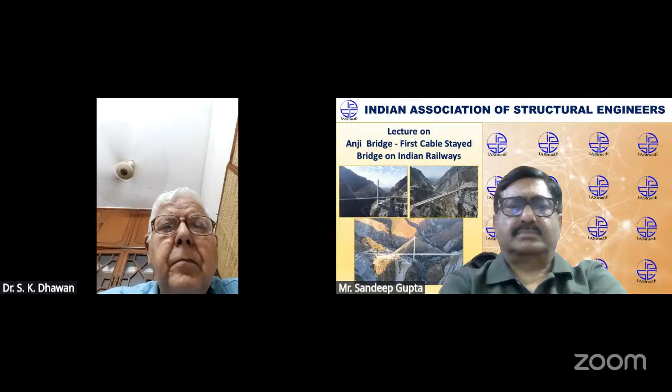The Indian Association of Structural Engineers, also known as IAStructE, was conceptualized and constituted in the year 2002 by a group of senior professional structural engineers from all over the country. IAStructE is registered under the Societies Registration Act 21 of 1860.

IAStructE is a national apex body of structural engineers in India with a mission to promote the structural engineering profession and cater to the professional needs of the structural fraternity. In the short span of 2 decades, the association has attained an eminent position in the professional field. Its membership is valued very highly in the profession.

Since inception, IAStructE has been led by eminent structural engineers like late Shri Mahendra Raj, late Shri Shri Kumar Ghosh, Shri Subhash Chand Mehrotra, Professor Mahesh Tandon, Shri Alok Bhaumik, Shri Manoj Mittal and Professor R. Pradeep Kumar as its president. IAStructE is a permanent member of the Engineering Council of India and interacts with the government on professional and policy matters related to civil and structural engineers.

To expand its reach, IAStructE has collaboration with various international professional like-minded associations and institutions. IAStructE's prime objective is supporting and protecting the profession of structural engineering by upholding professional standards and acting as a mouthpiece for structural engineers in India.

IAStructE endeavors to ensure that its members develop the necessary skills in structural engineering and work to the highest standards by maintaining a commitment to professional ethics and standards. IAStructE is actively engaged in organizing several continuing professional development (CPD) courses for structural engineers to help them update their knowledge and advance their career paths.

It also conducts refresher courses for young and practicing engineers and student-oriented programs, seminars, workshops, conferences, technical lectures and discussions related to the latest technological advancements. Case studies are also organized regularly for members to enable them to continuously update their knowledge and skill set by interacting with the best minds from the industry.

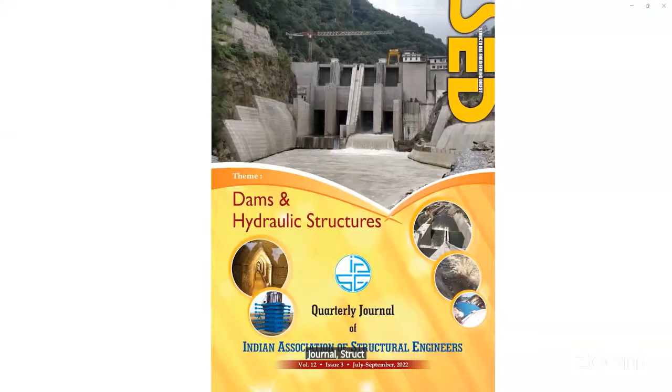IAStructE's activities are widely appreciated and known for quality technical content. IAStructE is also actively engaged in publishing its quarterly journal Structural Engineering Digest (SED), code commentaries, professional guidelines, and a monthly newsletter. IAStructE's publications are becoming popular with time.

IAStructE has representation in various technical committees of BIS and IRC as well. Its members are actively contributing to National Code Formulations.

In the year 2020, IAStructE started a National Awards competition to stimulate interest in the structural engineering field and to promote innovative thinking and creativity. The awards are presented to winners in recognition of their outstanding contribution to structural engineering in categories including Outstanding Structure, Outstanding Structural Engineer, Outstanding Woman Structural Engineer, Promising Young Structural Engineer, and Best Master's Thesis in Structural Engineering.

IAStructE is currently operating from 4 regional centers, namely Eastern, Western, Northern, and Southern, having its headquarters in Delhi, to inculcate professional culture and provide handholding to budding engineers. IAStructE also has student chapters in several leading engineering institutions.

Membership of IAStructE is open to all civil and structural engineers engaged in the structural engineering profession. Members are elected based on their qualifications and experience in different grades as per eligibility requirements prescribed in the bylaws. Each application is carefully scrutinized before electing the members.

More information about IAStructE is available on its website, www.iastructe.co.in.

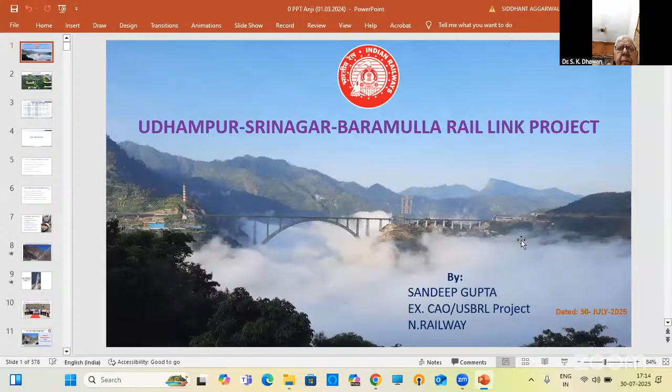I hope the screen is visible and I am audible. Yes, please. So I'll just start with a very iconic picture of the iconic bridge, the marvel of India, that is Chenab Bridge. What we'll say, a bridge above the clouds, as you used to say for the Millau Viaduct, that a bridge is over the clouds. It's a majestic picture. I'll start with this.

So before taking up the presentation on Anji Khad Bridge, I'll briefly dwell on the overview of the project, that is the Udhampur Srinagar Baramulla Rail Link Project, which is 272 kilometers long, and it is a national project. It was declared a national project by the Honorable Prime Minister in 2002.

Post-independence, this was the most difficult and challenging project for the Indian Railways to construct. It was a dream which was dreamt many times, but now it is a reality. People thought that it will never be done, but Indian railway engineers proved everyone wrong, and now you can go from Katra to Srinagar by rail in less than 3 hours. And I invite everybody to take a ride from Katra to Srinagar. They can go in the morning, come back in the evening, whereas by road it takes a lot of hours.

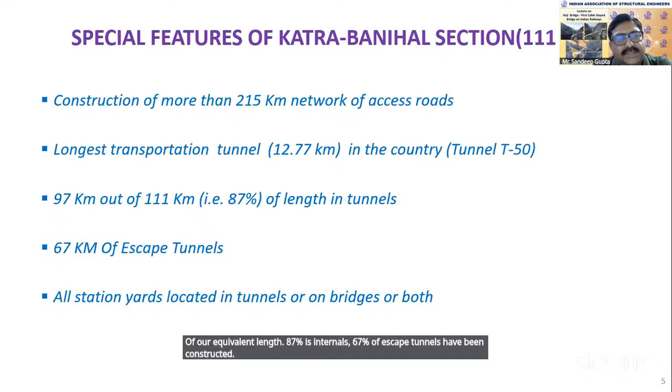Katra-Banihal section has special features. We had to construct about 215 kilometers of approach route, which was a project in itself. The longest transportation tunnel of the country, T50, is 12.77 kilometers long, with a parallel escape tunnel of equivalent length. 87% is in tunnels, and 67 kilometers of escape tunnels have been constructed. All station yards are located in tunnels, on bridges, or both.

Another special feature of this project, first time on Indian Railways: as in metro railways, all station yards are on ballastless track, and the turnouts are canted and jointless. In all 7 stations we have provided BLT, ballastless track. There are no joints, so when you travel at 100 kmph through a yard, you won't feel as if you have crossed a yard.

Similarly, the world's highest railway arch bridge, Chenab, is there. The first cable-stayed bridge on Indian Railways, Anji Bridge, though not the world's first, people were skeptical whether it would be possible, but we did it. For the first time we used reinforced earth embankments up to 60 meters high to accommodate the yards, and for the first time on mainline broad gauge railways we have used rigid overhead conductor system, ROCS, for electrification.

I'll dwell for a few seconds on the Katra-Reasi section because this was the most critical section for commissioning of the entire project. We completed the work well within December 2024. We did the load testing of Anji Bridge, but because of the time available with Commission of Railway Safety, the inspection was carried out in the first week of January. We did a successful speed trial on 8th of January 2025, and got CRS authorization on 14th January 2025.

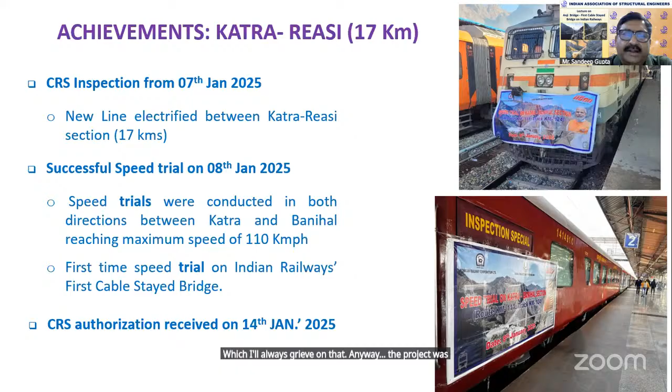However, due to certain reasons, the entire project could not be dedicated to the nation till February 28th, the time I retired, which I will always grieve over. Anyway, the project was finally dedicated to the nation by the Honorable PM on 6th of June.

I'll show you a picture when we did a speed trial on this bridge. This is the day, 8th of January 2025 this year.

After commissioning of the section, we did trials of Vande Bharat trains, because initially it was envisaged to start train services between the mainland and Delhi using specially designed Vande Bharat trains due to the temperature and long tunnels. This is one of our small videos of one of the trials.

I'm just concentrating on Anji Bridge because my lecture is on this bridge only.

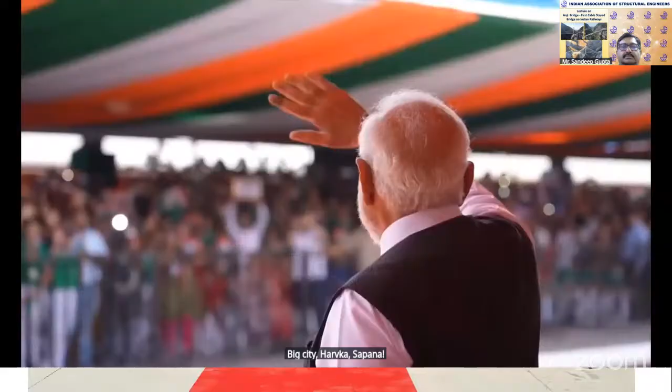Now I'll start with the main topic. Sorry, I took about 20 minutes extra. Doesn't matter, please continue.

Now, the evolution of the idea of construction of Anji Bridge across Anji Khad. Initially, we had two iconic bridges on the Katra-Banihal section, Anji Bridge and Chenab Bridge. At the time of award of the contract, around 2003-04, both bridges were planned to be constructed as arch bridges, just like Chenab Bridge.

I'll show you a GAD which was envisaged at that time. This was a GAD for Anji Bridge, like a small Chenab bridge. The only thing is, if you see the left-hand side, which is the Katra side, about 120 meters length is required, and the space at the Katra side was very limited.

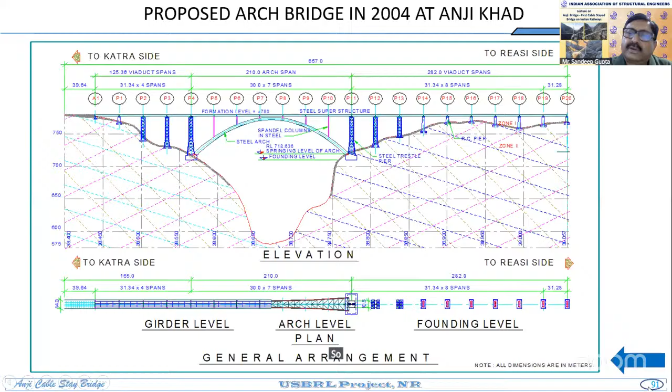There were issues about stability also. This work was allotted to Gammon JV in 2004.

However, due to alignment issues, there was pendency of works. All the works on the Katra-Banihal section were stopped by the Railway Board, and this work was finally short closed, as Gammon JV thought it won't be viable for them to continue the project since it was not sure when the work will be restarted.

From 2010 to 2015, the work remained entirely suspended, first because of alignment issues, then because of various PILs and repeated PILs filed by certain people who wanted to derail the project.

Finally, when all these issues were sorted out in May 2016, we appointed Messrs. Italferr from Italy. They are just like the RITES of Indian Railways, considered the Italian Railway, as the consultant for designing the bridge across Anji. The whole scheme was reviewed and a fresh view was taken to complete the bridge.

The main objective was to complete the bridge in a fixed time frame and to accommodate the two tunnels. The distance between tunnel number 2 and 3 was already fixed, as construction had started, with only 770 meters in between. So we had to accommodate those tunnels and construct a bridge at that location.

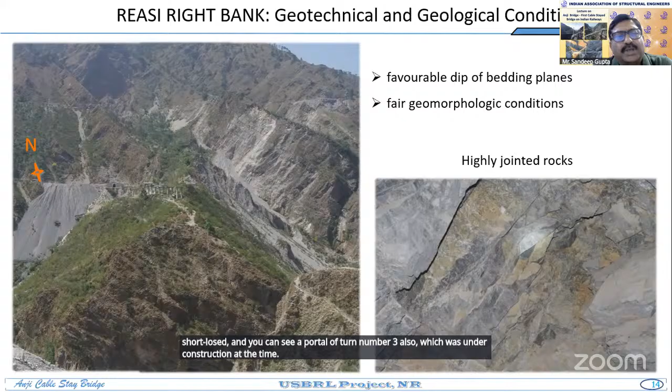On this side, if you see the left photograph, you will see some piers constructed. These piers were constructed by the then Gammon JV when the work was not short closed. You can also see a portal of tunnel number 3, which was under construction at the time. You can just see the topography, how difficult it was.

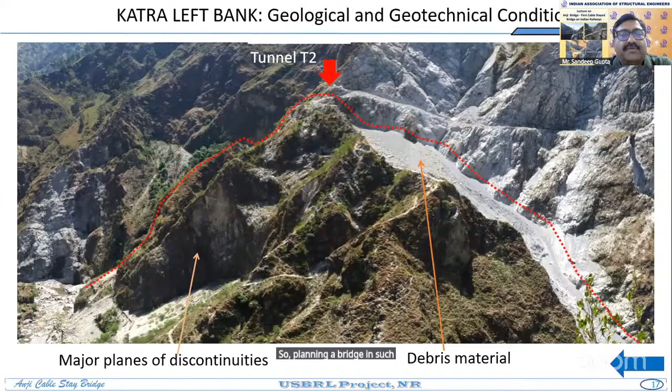As I have already explained, due to space constraint and slope stability issues at one of the ends, that is the Katra end, when we start from Katra, the first end, it was decided to go for an asymmetrical solution in view of available space and good slope stability at the Reasi end. We had about 350 meters of stretch which we could have used. So an asymmetrical solution was the viable option.

For this asymmetrical solution, two types of bridges could have been constructed: one was the cable stayed bridge, and the other was the spandrel truss bridge. The cable stayed bridge was finally zeroed on, and it was decided we should go for a cable stayed bridge.

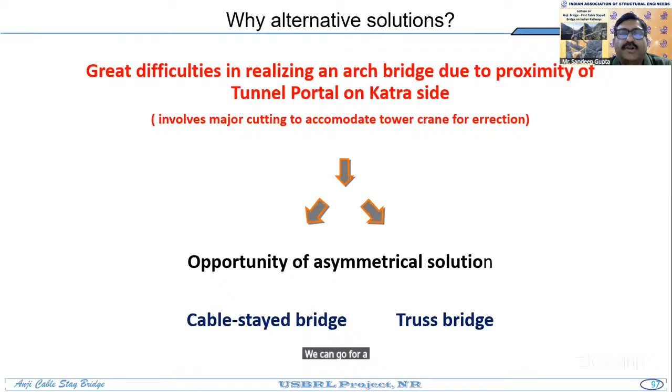For a cable stayed bridge and for a spandrel truss, the cost was comparable. Time of construction was minimum for a cable stayed bridge. We had fixed timelines and we thought, yes, it can be done. Risk in phased construction was also minimum for both cable stayed and spandrel truss. As far as maintenance goes, the cable stayed bridge was considered to have the least effort. So based on this SWOT analysis, we decided to go for a cable stayed bridge.

However, we had certain demerits and merits. I have already said that on the Katra side, only a small foundation would be there, a small abutment where the bridge will be resting. We won't be disturbing that slope.

All the works will be carried out only on one side, that is the Reasi side. No heavy equipment was required to build this bridge. For Chenab bridge, we had to construct a lot of enabling works. Here, only a single tower crane was required to be erected.

Construction phases were clear and well defined. Construction time is comparatively less, and a reliable program can be prepared. I am happy to share with you, sir, whatever we had planned: we planned that this cable stayed bridge would be completed in a timeline of 5 years, and we did it. We did it in almost less than 5 years.

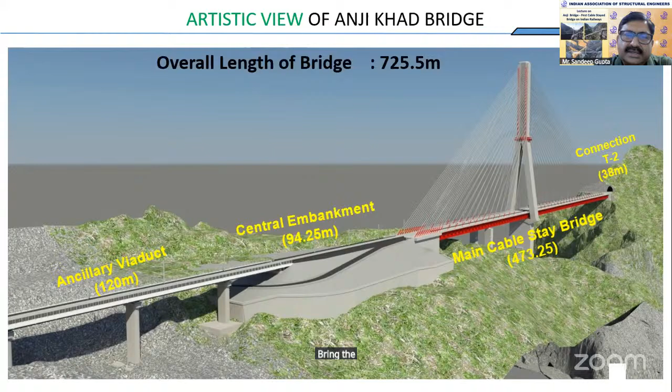The main bridge which we planned, cable stayed to bridge the Anji gorge, was 473.25 meters. There was a connection of 38 meters, required because otherwise, had we continued the bridge for another 38 meters, the height of the pylon would have become uncontrollable. Then we had to make 120 meters of viaduct, and then we planned a central embankment of 94.25 meters. You may ask why this ancillary viaduct could not have been extended right up to the cable stayed bridge. The reason is that for logistic purposes, we wanted to erect our erection workshop there — outsource our fabrication, bring the parts, erect in the workshop, and launch it. So that was the logic behind it.

Now this is a general arrangement drawing. I am talking about the main Anji Khad bridge, which is 473.25 meters long. As you see, this is an asymmetrical cable stayed bridge. The main span we call the C span, and the shorter rear span is the L span. The C span is 290 meters, and in the rear it is 80 plus 75 meters.

We have got a small pylon there to support it, and on the right side this is what we call a modified abutment, an innovative sort of abutment we call MA2 — that is main bridge abutment A2. Being an asymmetrical bridge, the total number of cables were 24 in the front C section, 24 in the rear section, 24 on the left side, 24 on the right side — so 24 into 4, that is 96 cables. Out of these, 12 cables balance each other, and those balanced 12 cables had to be anchored in MA2 so as to balance the bridge. Therefore we had to construct MA2 with special features, which I'll be discussing in my subsequent slides.

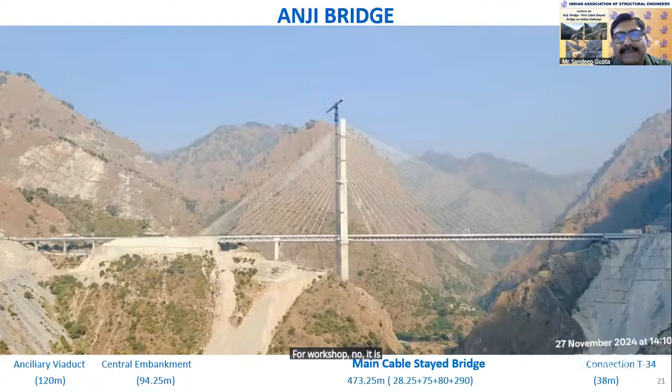Just to summarize the agencies involved: the main client was Northern Railway. The Railway Board gave the work of this section to Messrs. Konkan Railway Corporation on nomination basis — they were the engineers. The contractor was Messrs. HCC. Our design consultant, as I already told you, was Messrs. Italferr from Italy. Slope stabilization was done by IISc Bangalore and IIT Delhi. For proof design, the proof consultant was Messrs. COWI from UK, and as far as slope stability goes, it was ITASCA from US, which did the proof checking through 3DEC analysis, for which ITASCA are pioneers.

As I already told you, we had only 5 years to complete the bridge. We did not have the luxury like Chenab Bridge of 20-25 years. So we decided not to go for any fabrication at site, and to ensure proper and good quality, we outsourced our fabrication to 4 different agencies.

One of the agencies is ATMASTCO at Bhilai. Then Messrs. ArcelorMittal Nippon Steel in Surat, where maximum fabrication was done at this workshop. In fact, we added ATMASTCO when we realized that we may be running short of time.

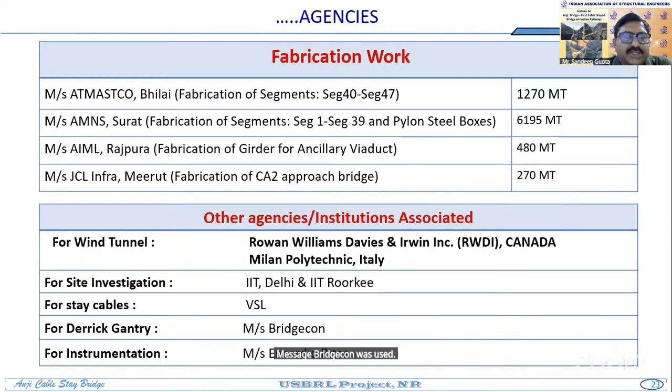For the stay cable installations, we used VSL from Switzerland. The derrick gantry, which was used to load the segments and launch it, was from Messrs. Bridgecon. And for the instrumentation purpose, Messrs. Encardio Rite were involved.

Now these are the salient features, as you see. From here it is very, very clear what is the height, what is the span. The main span is 290 meters. The main pylon is 193 meters. It is an inverted Y-shaped pylon. From the gorge bottom to the deck, the height is 196 meters. And from gorge to the top of the pylon, the height is 331 meters.

For construction of the pylon, we used Doka jump form shuttering. Since slip forming was not possible, we constructed the pylon in segments of 4 meters, and it was a continuous construction. The joints were prepared in a very professional way. If you see the photograph, you won't be able to identify the joints.

These are the salient features of the bridge. As I have already told you, the main bridge is 473.25 meters in length. 290 meters is the central span. The rear span involves 80 meters plus 75 meters.

Then MA2, the main abutment where 12 cables are anchored, is 28.25 meters long. Then there is the central embankment of 94.25 meters, ancillary viaduct of 120 meters, a connection at Katra end of 38 meters, making the entire length 725.5 meters.

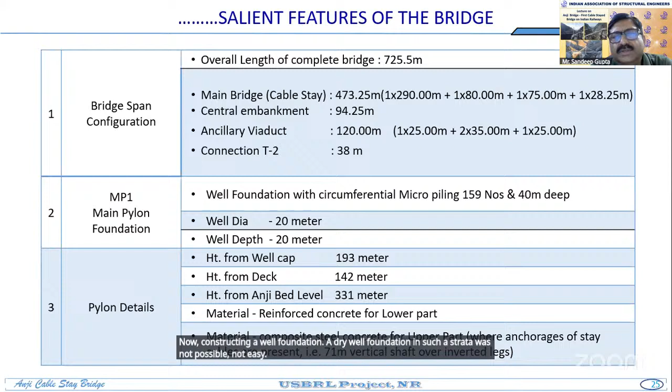The main pylon on which the entire bridge is resting has a well foundation. Now, constructing a dry well foundation in such a strata was not possible, not easy. We used the method of circumferential micropiling, and then we did manual excavation, which I'll be discussing in detail in my subsequent slides. The diameter of the well is 20 meters, the depth is 20 meters.

Height from well cap right up to the pylon, as I told you, is 193 meters. Height from the deck is 142 meters, inverted Y. Height from Anji bed, again repeating, is 331 meters. Material used in the lower part is reinforced concrete - lower part meaning till the Y junction. The vertical shaft is a composite steel concrete structure because all the stays are embedded in it. For that we needed tensile stresses also, tensile forces. So it had to be a composite structure.

As you see, the deck width of the main bridge is 15 meters. Now it is very interesting - we had to construct a bridge only for a single line track. The width could have been around 8 or 9 meters, which would have sufficed, but we had to make a wider deck because of stability concerns, because of high winds. So we planned to have one track broad gauge line and a parallel service road of 3.75 meter width for our disaster management.

Then the deck width on the embankment was again 14.5 meters. For the ancillary viaduct, as I told you, it is 9.45 meters, with no service road on that. Then the deck width connecting the last connection is 13.4 meters. Coming to stay cables, very interesting - as I told you, we had a total of 96 cables.

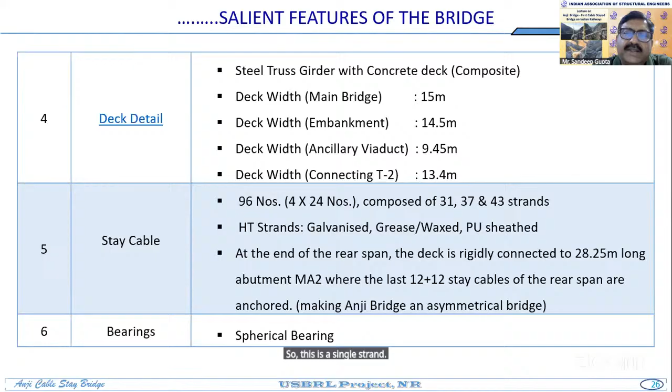That 15.7 mm diameter becomes 18.7 mm, and every strand is replaceable. So this is a single strand, and 31, 37, 43 strands make up a cable, depending on the design.

At the end of the rear span, the deck is rigidly connected to 28.25 meter long MA2 abutment, where 12 plus 12 stay cables of the rear span are anchored, making Anji bridge an asymmetrical bridge. All the bearings are spherical.

The design life of the bridge is 120 years. The maximum speed for which it is designed is 100 kmph. The service loads have been designed as per MBG 87 loading of railway loading. Design loading is IRS railway codes. However, the design of structures has been done using BS and Euro codes.

The critical wind speed based on our wind tunnel testing is 213 kmph for a 3-second gust. As per earthquake zoning, the Anji Khad location lies in zone 4, but we designed for zone 5. We did site-specific spectral studies through IIT Delhi, and based on the maximum critical earthquake and PGA parameters, we designed the bridge.

These are certain quantities which I will not dwell much on. You can just see the enormity of the bridge. For the main pylon we used 159 micropiles. Some cable anchors were used for the slope stability, and so forth.

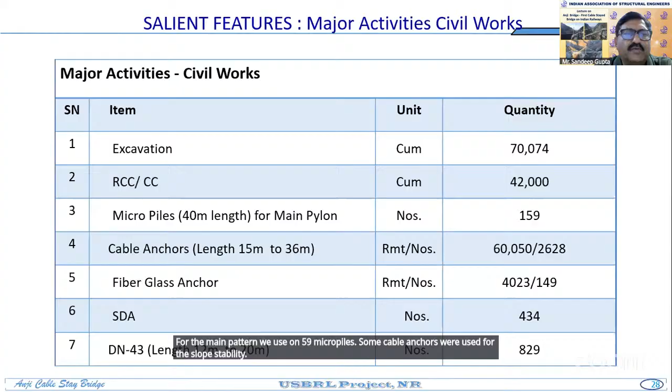The main interesting part is the stay cable installations. 96 cables were used. The length of each cable varied from 80 meters to 290 meters, depending on the length of the bridge. If we add up the entire strands, the total running length is in the range of 650 kilometers plus.

That is the distance from Anji to Delhi. The weight was 850 tons. Just imagine weaving 650 kilometers of strands one by one. How much time and effort it must have taken.

Then there were special bridge expansion joints, because being a very long span bridge, special BEJs had to be manufactured. We got it done through Foslo. Then SEJ, that is switch expansion joints or rails, we call them rail expansion joints, special rail expansion joints. These are also special, not used on Indian Railway as yet. Again from Foslo, 2 numbers were used.

Then track linking was 780 meters. An aberration is here: the entire section from Katra to Banihal has been designed and constructed on ballastless track. But for this Anji cable-stayed bridge, we decided to go for a ballasted track. The reason is that there is a camber of 40 centimeters at 2/3 of the length, and had we provided ballastless track, it would have cracked.

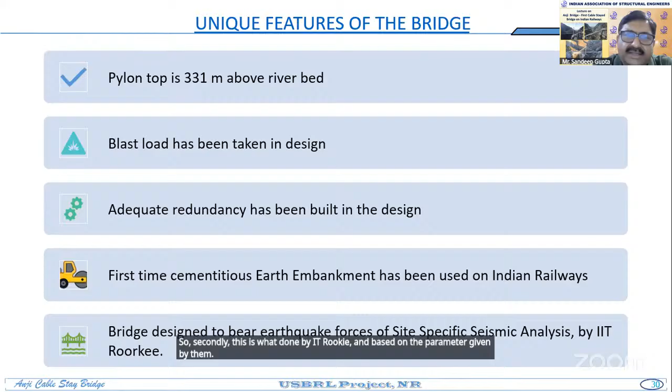The bridge has a service road of 3.75 meters along the track because we have an escape tunnel in T2. From the escape tunnel, you can go along the road, but this is only for emergency conditions. Then, state-of-the-art instrumentation for structural health monitoring of the bridge has been done.

On this project, we have provided a state-of-the-art instrumentation system for monitoring structural health on 4 bridges: Chenab Bridge, Anji Bridge, Bakkal Bridge, and Reasi Bridge, each having a separate control station. For Anji Bridge, we have a control room right inside main abutment 2 on the bridge itself. The bridge has been designed for a critical speed of 213 km/h for a 3-second gust.

As I have already told you, 8260MT structural steel was used for the superstructure steel boxes. Now coming to the construction methodology and launching sequence.

As I have already elaborated, we had a mandate to complete the bridge in the shortest available time, which was decided as 5 years. So we had to plan a scheme very meticulously so that we could do a lot of activities in parallel, and the bridge could be completed, including load test and track linking, in 5 years.

So the first part was what we started. I am not discussing the ancillary viaduct part; that was done separately, we can consider it a separate bridge. For the main bridge...

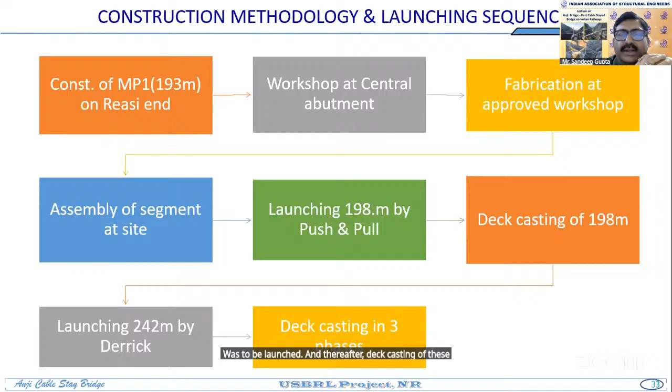Thereafter, we had to erect the derrick gantry, and with the help of that gantry, the balance 242 meters was launched. After that, deck casting of this 242 meters was done in 3 phases as per the designer's scheme.

So just to summarize, the main pylon, 193 meters, had to be constructed at the Reasi end, completed well before we started cable launching. Similarly, the workshop had to be assembled and segments erected there by the time we needed to start the end launching.

The 10-meter long span I have already discussed. All segments fabricated in the outsourced workshops were jointed by HSFG bolts, M27 10.9 class HSFG bolts. We ensured no welding took place at site to maintain quality. So incremental launching, launching by derrick gantry for 242 meters, and deck casting—I've already discussed these. Now, going stage by stage, I'll take you through the next 5-7 minutes.

Then phase 2, my workshop is ready. The earthwork has been done. Steel girders for incremental launching - we have to erect a 30-meter long launching nose. Fabrication has to be completed.

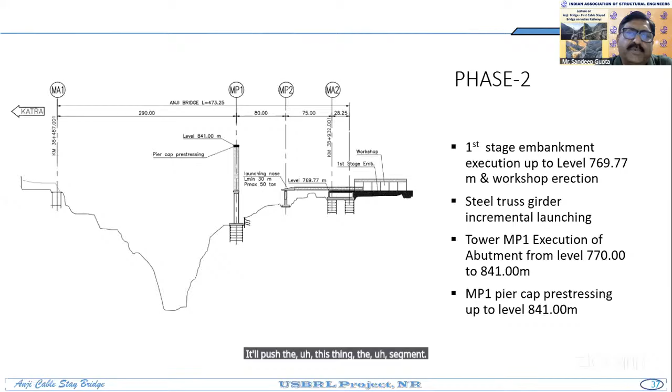Now the next stage is that we have to make up the MA2 abutment and earthwork so that I can now launch my segments over this deck. Therefore it has to be made up, and that work was done in phase 4.

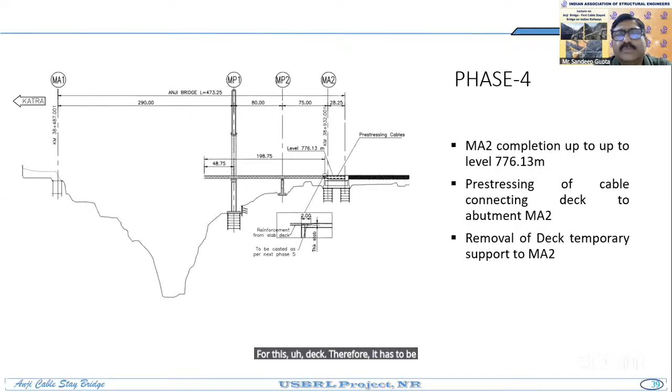Then phase 5 involved erection of my derrick gantry, the launching gantry, for facilitating launching of my segments. Now there is a catch - what problem occurred was that this is the plan given by the designer, but at site it was not feasible. I would like to emphasize to all budding and seasoned engineers: every bridge has site-specific issues. You cannot go purely theoretically by what the designer says sitting in Italy. We are at site, we have to use our head, use site-specific solutions, and have an interactive session with designers to convince them what can be done and what cannot.

The problem was that the designer decided the launching gantry had to be erected right at the end of the segment which had been launched. Now, for erecting this gantry, I needed a tower crane. My tower crane had a jib length of 35 meters and a capacity of 25 tons - it could not have been used to erect the gantry.

So, as I was chief at that time, I gave a solution to my site team and HCC people: why don't we erect this gantry at the pylon location, have rails after erection - because that can be done using the tower crane - and then push it to the end of the already launched segment. Now Italferr was not agreeing to it because it involved certain stresses. But on my insistence, they rechecked the design and finally had to agree to it, and this way the things were done.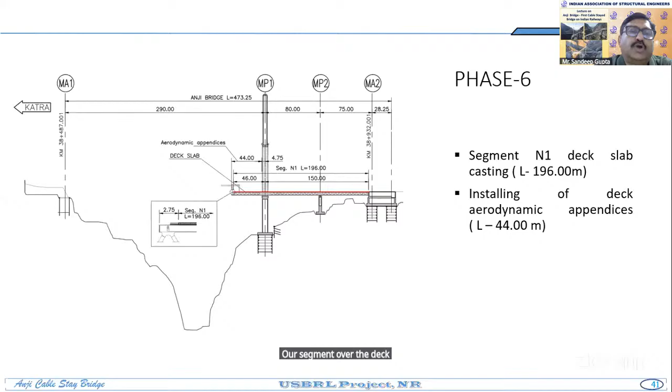Now you see, after the gantry was shifted to the location where it was needed, the deck was cast. The deck was cast because now we wanted to move our segment over the deck so that it could be launched by the derrick gantry using stay cables.

Now, the next stage - even before I start launching my first segment, I had to install 2 sets of cables and stress them, because the gantry itself was 200 tons and the individual segment was 150 tons. Had we not stressed these 2 cables, the gantry would have toppled. Just to give more strength, we had to first, without even launching, install these 2 sets of cables and stress them. Thereafter, launching was possible.

In the first stage of launching, 10 segments of 10 meters long, that is 100 meters, were launched. The segments are 15 meters wide.

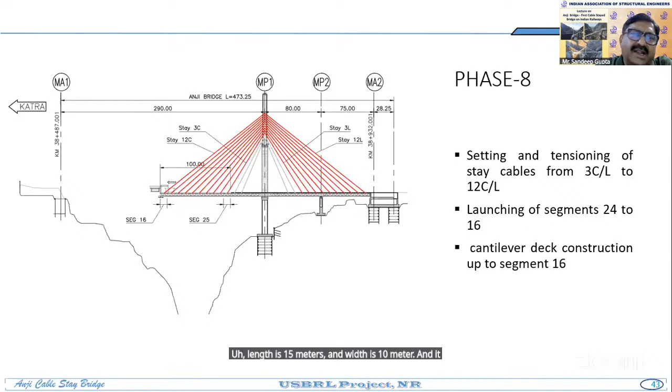After completing this 100-meter launching, we did the slab casting. Now, after slab casting, I'll show you in my subsequent slides.

After launching of each segment, we used to measure and draw the profile of the deck, the profile of the pylon, and the levels of the top of foundation, and compare it with those given by the designer. Yes, there had to be variation - we used to share this with them in Italy, and only after they gave us the go-ahead did we launch the next segment.

So you would appreciate, we had planned to launch 3 segments every month - that is 1 segment per 10 days - and we ensured that it was done. We were monitoring it on a 24-hour basis. The team of Northern Railway, Konkan Railway, HCC, and VSL worked in tandem. It was an amazing show of team workmanship. I would like to acknowledge this fact, sir.

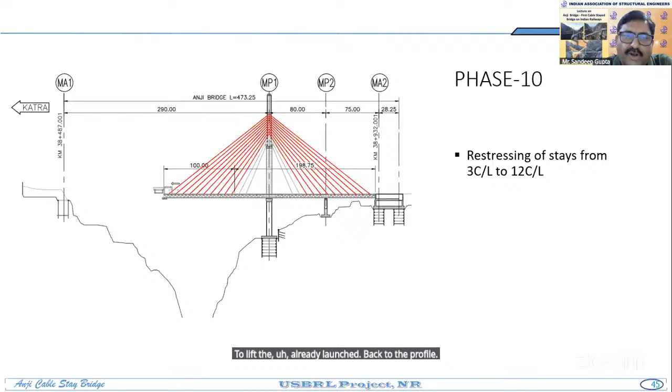So after this, based on the designer's input, first stage stressing of all the cables was done to lift the already launched deck to the profile envisaged by the designer. Thereafter, we went ahead and launched another 10 segments.

The last 3 segments were launched without any stay cables, as per the design, already explained. Before laying the deck for the last portion, we had to put some loading on the derrick end, because if we had not done this, re-stressing of the cables could have caused upliftment.

Based on that profile, we were very fortunate because of our good workmanship, quality control, and close monitoring. The last segment perfectly launched and got rested on the abutment. Thereafter, as per the designer, we did final restressing of the cables.

Then the deck was cast. The ballast and the gantry were removed from the other end. Now, we have already completed the cabling work, the deck is complete, and the profile is perfect.

But for future analysis, we need to know what is the force in each of the cables. So every time we work out the actual force in the cable—in the subsequent slide I'll show how we have done the weighing.

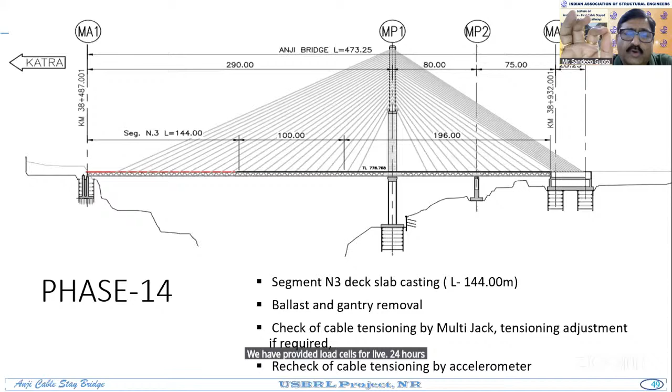In phase 15, we finished the work and laid the track. Again using the accelerometer, we find the force in the cables, check it with the designer's values, and when it is ensured that no restressing is to be done, we cut the cables, fill them with grease, and provide the caps.

This is the complete bridge picture, which has been done.

Now, you must have been bored by my lecture. I will show you a small video prepared when the bridge was not exactly completed. It will show you the push-pull launching method, then the launching method used by the derrick. Thereafter, I'll show you another video only for launching. So if you permit me, I'll just show you the video.

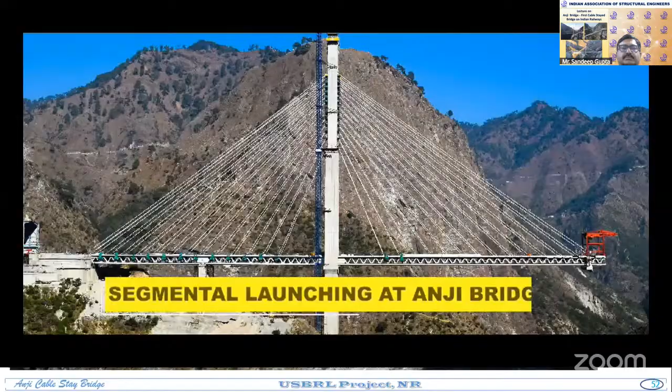Sorry, I'll just stop at this location. I'll show you another video of a segment launching, which is more interesting. Now, please—this is a segmental launching.

This is a segmental launching.

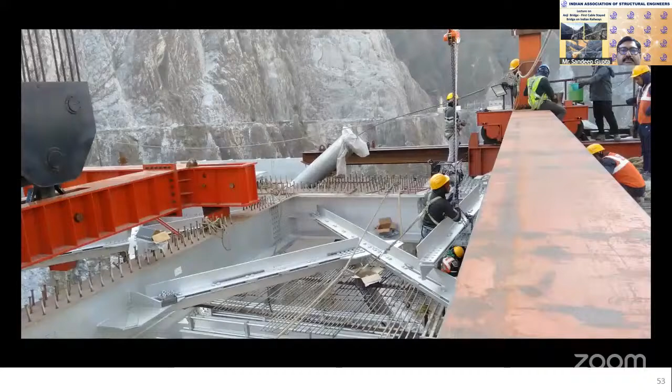The most interesting part of this launching, you may see—this photograph shows a very, very flimsy launching gantry. This gantry had a capacity of 200 tons. My segment was 150 tons. The yellow part is the hoist, which lifts the segment.

And then there is a cantilever portion of 10 meters where the gantry is taken and lowered. We had a limitation of load because the designer told us the gantry cannot be more than 200 tons of weight, and we needed space also. So the entire gantry seemed very, very flimsy—it was not giving much confidence to me. We started to launch the first segment in May 2022.

R.K. Gupta of Bridgecon, the late R.K. Gupta ji, was a very good friend of mine. His company designed this derrick gantry. I discussed it with Gupta sir because he had worked with me earlier also.

Gupta ji, I am not very, very sure whether this is going to work. I am worried my segment may crash into the gorge. He assured me, Sandeep, nothing will happen, you just go ahead with it.

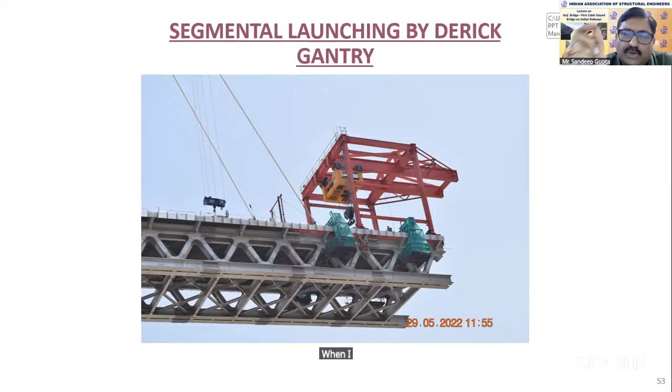I asked my deputy chief here, it was evening about 4 or 5 o'clock, to go climb the gantry and see what is happening. That day only, the new chief administrative officer had joined.

He had no stakes at that time. I told him, sir, things are not good, I am going to stop the work. Till this gantry is retrofitted, erected and tested, only then will I continue with the launching.

Now the time frame was very strict. The Railway Board would not have accepted a stoppage of one month. Then my CAO told me, you are taking a big risk, I am new, you are the arrowhead, you are going to get the stick.

I told him, sir, let them suspend me, let them transfer me, but I will not go ahead with any further launching till the time I am sure the derrick is okay. Sir, we took one month to retrofit that derrick.

The fixed joint had to be changed to hinge joints. Certain external prestressing was done. Thereafter we made a checklist of what levels we had to check every 2 hours. So when we started the launching again, the initial 3 days of the 10-day process were like a patient in the ICU.

For 3 days, none of us slept, till the load sharing happened by fixing of the top chord and splicing was done. Then the loads were shared. The first 3 days were like hell.

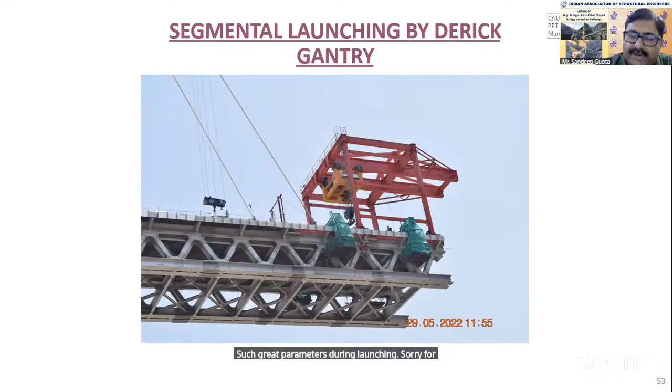Now this is the complete picture. If time had been there, I could have gone on for hours, but I will take some time to dwell on the construction of MP1, the main pylon, which people will be interested in.

As you see in this figure, the diameter is 20 meters for the proposed well. For facilitating construction of this dry well, we had to put in place micro piles of 20 centimeter diameter. The hole was 24 centimeters, center to center of 40 centimeters.

The piles were 40 meters long. The depth of the pile initially, as decided by the designer, was 30 meters. They envisaged that the founding level would be about 20 meters.

But as an abundant precaution, I was worried we may have to go further deep. I took a call to increase the depth of the piles from 30 to 40 meters, so that if we were required to go deeper, we would still have the required grip length. So this is the way we did it, as you see.

Initial drilling of the micro piles was very difficult. Lot of problems were there, frequent jamming of the machines was there. It took us about a year.

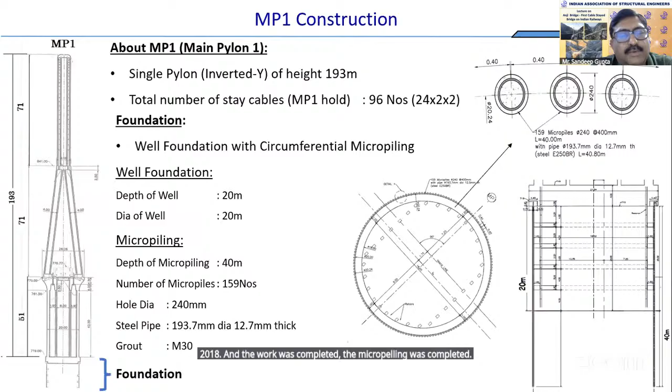We started micropiling sometime in April 2018, and the micropiling work was completed by about May 2019, so more than a year. These are some pictures of how we used the machines to do the micropiling.

I'll show you a small video also.

Once the piling was completed, we had a top well cap, 1.4 meters wide and 1 meter deep, before starting our excavation. Excavation was done using excavators. We had a high capacity crane to lower our excavators.

You can see the way we are excavating, and the enclosing micro piles - they are not exactly straight, but this is the best we could have done. We had a 40 metric ton capacity crane to lower the entire Poclain inside and to take out the muck.

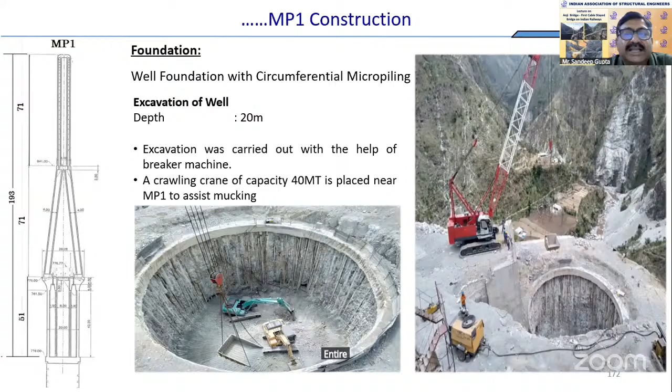Now we have reached the founding levels. Before we decided on the founding levels, our consultant from Italy came, went down the well, assessed, and then gave us a green signal to go ahead. Yes, now we can plug it.

Then we placed 24 columns of RCC at the periphery before doing the concreting. Now concreting has been done in M35. This is the top of this thing. Now the well cap has been cast.

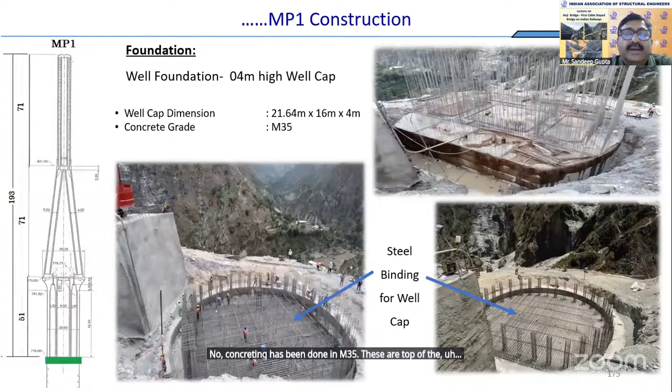After casting the well cap, we had to start construction of the main pylon, for which we needed a tower crane. We made a foundation for the tower crane just adjacent to the pylon.

The tower crane was from Comansa, Spain. The height of the crane was 205 meters, and our pylon was 193 meters - good enough. The jib length was 40 meters and the crane capacity was for 25 tons. As you increase the length of the jib, the capacity comes down. So these factors had to be kept in mind while erecting our main pylon.

This is a small video showing how we erected this special tower crane. Main pylon MP1 of this bridge will stand tall to a height of 193 meters from its foundation. For construction of such a high structure, there is a need for assistance of a tower crane, which makes this structure possible. Tower crane Comansa 21CM550 of 25 metric ton capacity is chosen for this role.

Tower crane mast section is set into a raft foundation with steel pedestal. Mast sections are plumbed to the required degree. Concrete support is added and then the crane is ready to be erected after curing of concrete.

After that, the first step is to build the initial tower. The tower comprises a series of sections called masts. Four such masts are connected with the use of a separate crane. After masts are set, the top climbing unit is added. This component is a special section set over the top mast and bigger in size, allowing for insertion of more masts. Without this, the tower crane would not be able to grow.

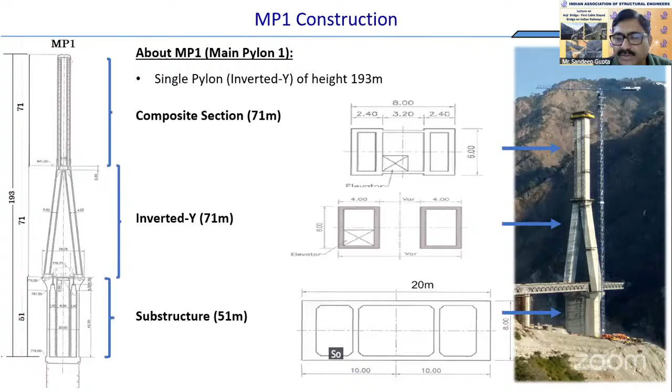Now this is the right side, you can see the Doka jump form shuttering. Outside shutters are lifted by jack, and inside shutters are lifted by the tower crane.

I'll just go briefly, and you can see how the construction progressed. In this Doka jump form shuttering, there are 3 platforms. The top is the working platform where we stand and do the concreting work. Then the first platform is where we adjust our brackets and jacks. Then the second platform is where we do the finishing work. And the bottom is where we do our curing work.

Let me add here, up to deck level we used pumped concrete, and beyond deck we could not use pumped concrete because the height was too high. And in the entire pylon, we have not used water as a curing compound or curing agent - we have used a special curing compound.

Now this is the way it progressed. Now we have reached the deck level. Up here, this pylon cap, deck cap had to be cast.

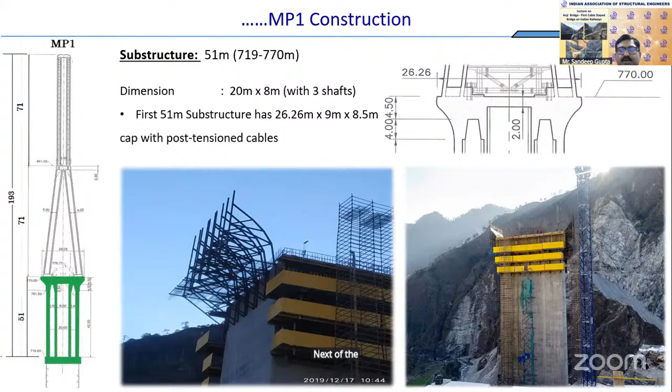This was around January 20. The cap had to be widened to accommodate the legs of the inverted Y. So the pier cap was pre-stressed.

One interesting feature is that when we were doing pre-stressing and casting of this pier cap, COVID was at its peak. In spite of COVID, we did not stop the work. We had a lot of fight with the state machinery, but we just went ahead with the work in a missionary zeal.

Now these are the cables. Stressing is being done. Now the pier cap is completed. After the pier cap, we have to start for the inverted Y.

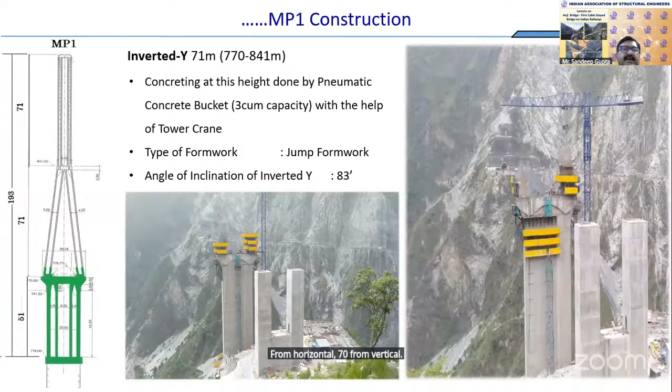The angle is 83 degrees from horizontal, and 7 from vertical. Now separate sets of shutters are there. One important thing is that for concreting, we could not use pumped concrete because of the height. We have used a pneumatic concrete bucket with a capacity of 3 cubic meters with the help of the tower crane.

The interesting feature is that whenever concreting was going on in these Y segments, it generally used to take us about 12 hours. All the workers, supervisors, engineers used to go climb to the location of concreting by a tower crane, which had a small cage.

But once they were at site, the cage was disengaged and the concrete bucket was attached, which means that for the entire 12 hours of concreting, nobody could come down. Food was sent above, and for nature calls, I will not discuss further. But this was the type of dedication we did.

I myself was there for 3 sets of concreting, continuous for 12 hours. My deputy chief engineer and executive engineer were 100% available. That's why we were able to achieve such good quality.

This is the way we are progressing. Now as you see, when the two legs come very close, then the shuttering of one of the legs had to be dismantled. That is, one of the legs' concreting has to be stopped because the space is becoming very less.

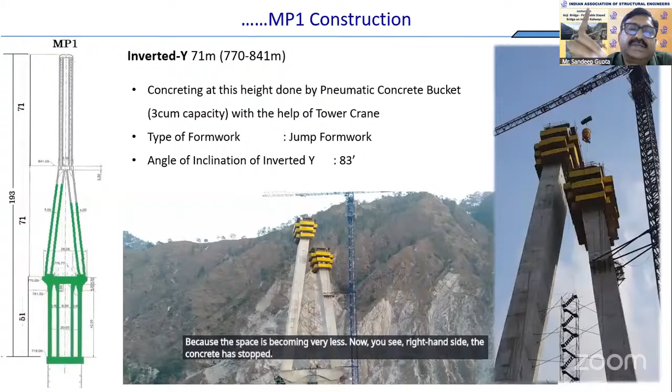Now you see, on the right hand side the concreting has stopped. On the left hand side we are taking over. Once the left hand side is over, then we will take up the right side. Now the two are almost at equal level.

Now a cap has to be constructed at this level. Because over this, a vertical shaft would be constructed, which will be composite, all the cables will be encased in the vertical shaft. Therefore, this pier cap was pre-stressed in both directions.

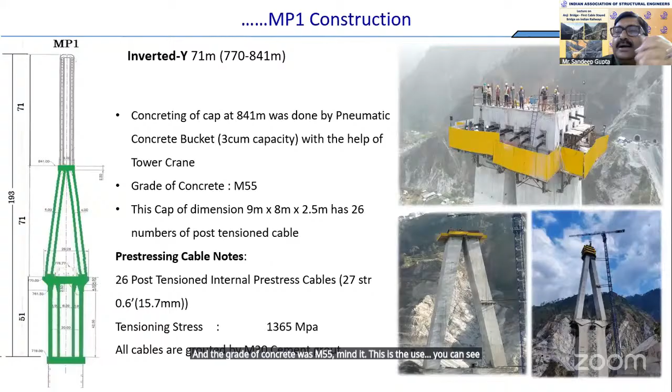And the grade of concrete was M55, mind it. This is, you can see the pre-stressing cables. These are on both sides. Now pre-stressing is done, completed, grouted, capped.

Now we have started the construction of the final vertical shaft, which is a composite structure. We have got fabricated steel pylon boxes of dimensions 5 meters by 1.1 meters, of different heights. We used to place those boxes at the location, connected with HSFG bolts.

They had shear connectors around them. Then we used to do the reinforcement work. So by doing so, the area became so congested after reinforcement that normal concreting was not possible. So for the entire vertical shaft of 71 meters, we have used self-compacting concrete.

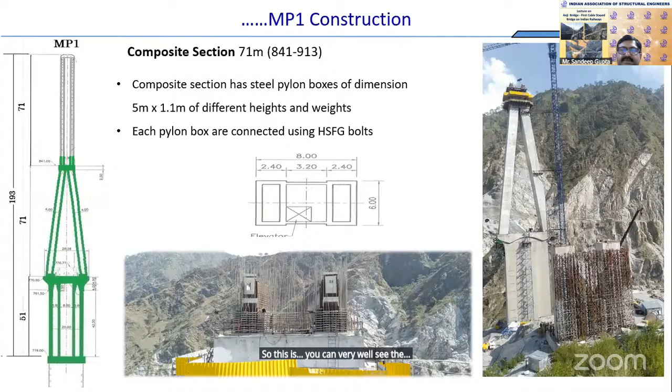Now this is, you can very well see the steel boxes. One innovation we did, which the consultant was not agreeing to. You see, the guide pipes had to be welded with the steel box, and there are guide pipes at the deck level.

These guide pipes are not at the same line. They are splayed because the width of the deck is 15 meters, and the width of this is less than 15 meters. So a very precise angle has to be set for each and every guide pipe. That exercise we did in the workshop, very perfect engineering, so that the angle is perfect, because such engineering cannot be done at the pylon site. So this was one of the changes we did against the design scheme, and it came up very well.

You can see we are erecting the boxes on the right hand side, doing the reinforcement work and concreting.

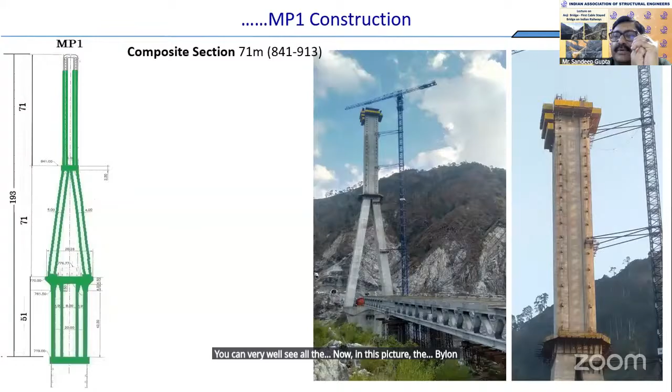You can see in this picture the pylon is completed. On the right side you can see the ducts. There are 24 guide pipes on the left and right sides for all the cables on both sides, at a very specified angle which was verified using total stations and precise surveying.

Now the cap at the pylon could be cast and closed only after completion of all the cable stressing work. That was the last activity. At the top, we placed a temporary platform to hoist and lift the stay cables.

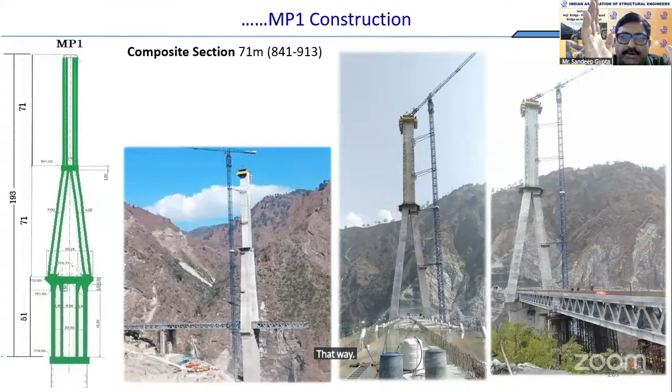This is one of the photographs. You will see that by the time my pylon is completed, the incremental launching using push and pull has also been completed. That means I am perfectly as per schedule. Now the next stage is to erect the gantry, which I'll come to later.

If you want, I can show you a small animated video, only for the pylon construction.

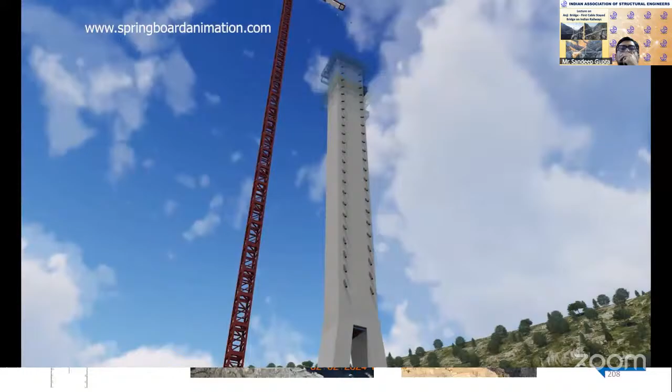Thanks for your patience.

Sandeep, sir, I have got two or three questions now, but since time is limited, I'll request Vikas to mail you those questions, since many people are now leaving the webinar. So I'll request Vikas to send you the questions and you can reply, and then we can circulate that. Will that be okay? Definitely.

Now, before we wind up, I have one or two things in mind. One is safety measures during construction, because so much work you have done. Second, the life of the structure is planned and designed for 120 years—how will we ensure monitoring for safety of the entire structure for 120 years? It's all exposed structure, whether steel or RC. For steel, what measures have been taken to prevent corrosion, and for the durability of concrete, to ensure its life for 120 years? What are the quality control and structural monitoring measures for the entire 120 years? This is my small request—please reply and then we'll wind it up.

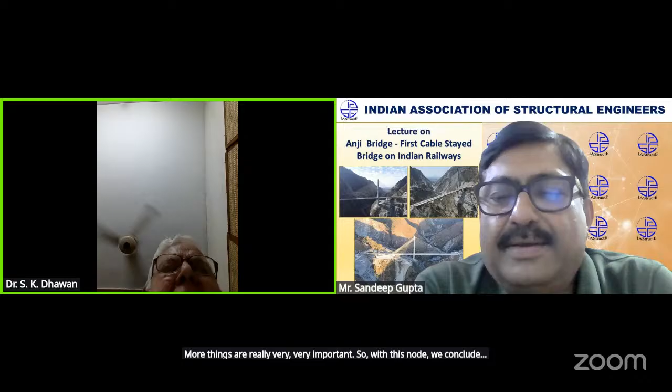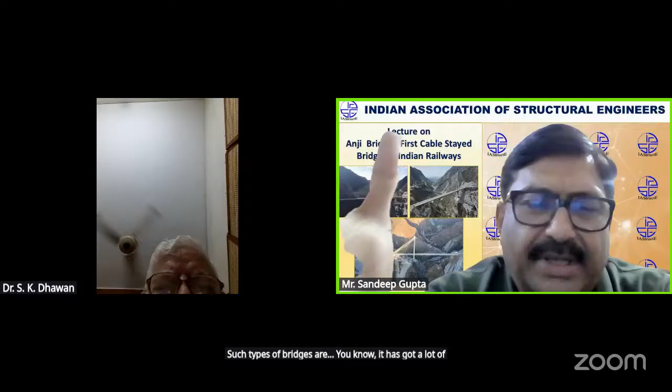And thanks to the speaker, Mr. Sandeep. Thank you very much, sir, and I hope you give me more opportunities, we can have more lectures of more time. Absolutely, I can give a presentation on the entire project and on the other bridges also. I'll be more happy if we can have an interaction in a physical forum. We will have a full day seminar somewhere where we'll listen to you, that is better for interaction. I agree, we'll have a full day session covering geotechnical investigation, planning, and construction, all those things. Such types of bridges have a lot of details, I can give a presentation for hours and hours, this is only a part of it, and everyone would be interested. I'm more interested in the young budding engineers.

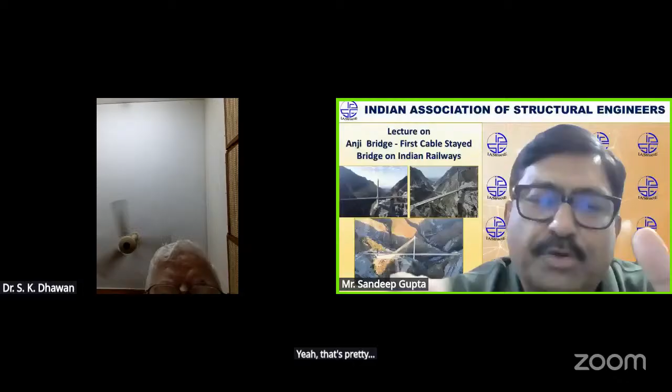Sir, for Indian Railways, this cable stayed bridge is the way forward. The Chenab Bridge has been constructed, but I don't think it will be constructed again. This is the first longest cable bridge constructed by my friend Sandeep. So I hope it is not the first, sir, many more will be constructed. Many more will come, yes.